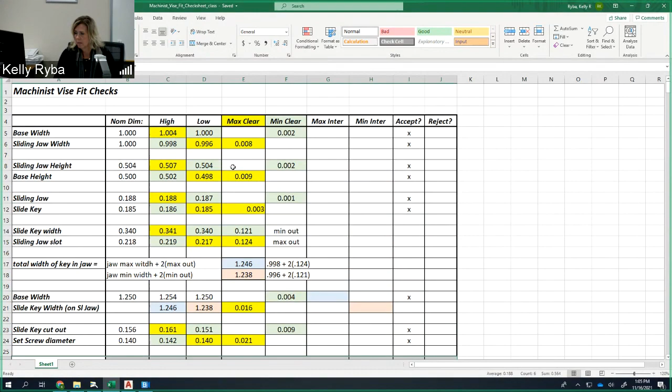And if you use the PDF version, just make sure that things are legible so that I can read them, but also that you can fit it in there, and you're going to have to scan it and then upload it. The Excel you can fill out, and then you can just attach the file itself or do an export and make a PDF too. It's up to you, whichever way. Both of them are pretty straightforward.

So where we left off yesterday, we went through up until the set screw location one, which is right about here. Okay, right about here. So we're going to be starting with this one today. And then, like I said, we're going to make our way through the rest of the fits here, and we'll be able to then start looking at our drawings and how we're going to adjust those.

So I know some people got pretty far on these yesterday based on the format that we were using, but there are a couple that I do want to demonstrate and make sure that we have a good handle on, and what my description meant, because I know there was a question or two on that as well. So the first one that we're going to look at here is going to be the set screw location and the slide key cutout depth.

Now, I don't know if these were the words that I used on the original one, because I think I might have changed the description here. So I just wanted to... hang on. Oh, there we go. This is the PDF version. So no, that one, I guess it is okay. It's this one right here we're going to be starting on. There might be one a little bit later that I changed.

So I'm going to pull my spreadsheet up, and where I have this grade is where we're going to be starting. Now, the numbers that we see here aren't really reflective of what we're going to be doing. So that's why I want to demonstrate this and show you a picture. So this guy is going to be utilizing the sliding jaw, the set screw, and the slide key, okay? So I'm going to go underneath my document camera.

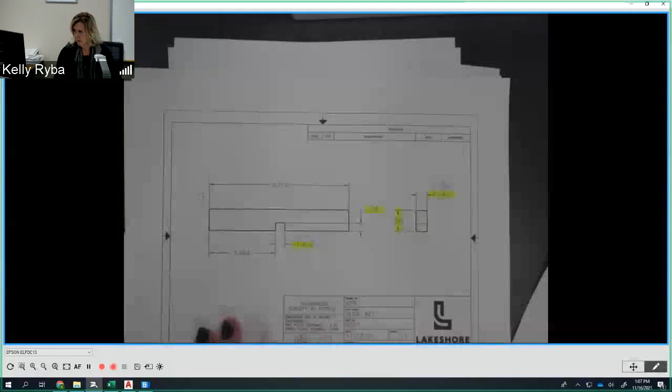And as we look at the dimensions that were given to us, so on the actual slide screw here, I'm sorry, the slide key itself, the dimension that we're going to be looking at here is going to be this guy right here. So on the pictorial, they do give us 0.341 to 0.340. I drew it at 0.340, so it would be to 0.341. Okay, would be the top.

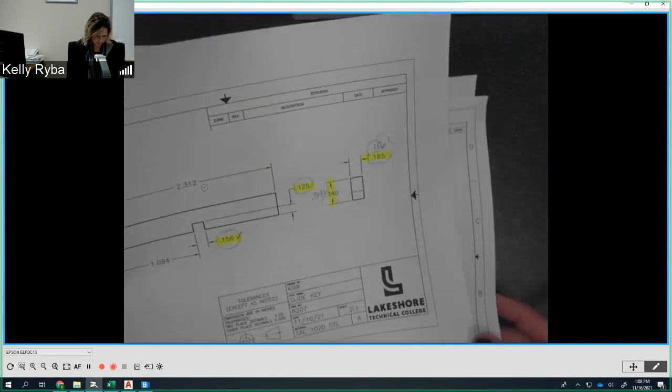So we want to check this, and we want to determine where we have this cutout right here, the 0.125, if our set screw is going to fit up in there. And oh my gosh, there's like three different views we've got to look at here. So this key is going to sit in this orientation horizontally like this, so that our cutout is right here, and the set screw is going to come up in between.

And what we want to make sure of is that this isn't going too far in or too far out, so that it actually can catch on that set screw. And that's going to be dependent on how it sits here in our sliding jaw, and also the size of the portion of the set screw that's going to be on center there. So what I want to do first is check how far in and out this surface right here is from the edge of the part.

So I wanted to draw this in a larger format so we can add some dimensions here and get a little bit better perspective, because that drawing is a little bit small. So here is the cutout in the sliding jaw. Okay, so here's that cutout, and that cutout dimension, if we call this edge 0, the left edge, so where I'm at is right here in this view, and then this is the cutout.

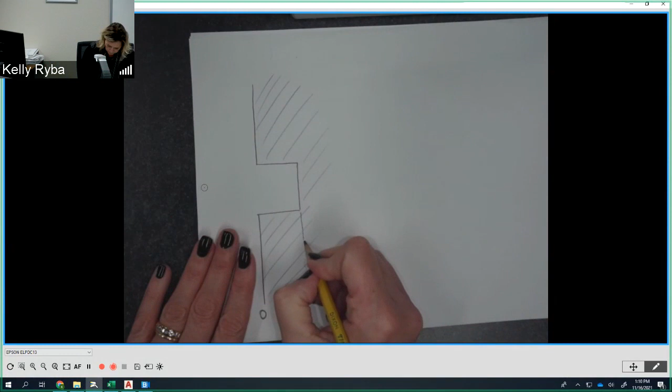And if I look at this right here, the dimension of that on our pictorial view goes from 0.219 to 0.217. Okay, so it can go out that far and in that far. So kind of like this, right? Now, when I slide this in, in this orientation, this is going to fit right in here. So I'm going to put it in here. It's really not going to have much of a gap at all, but the slide key in this orientation is going to sit in right like that.

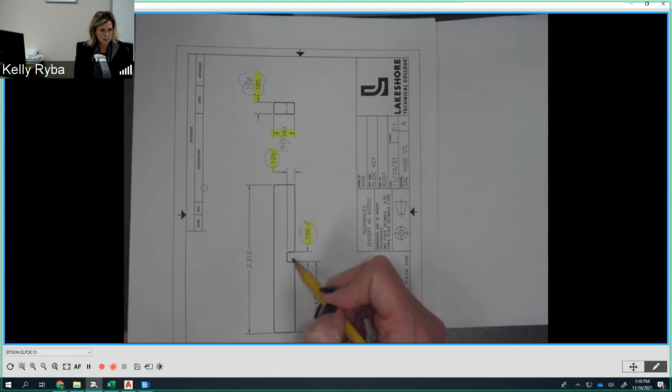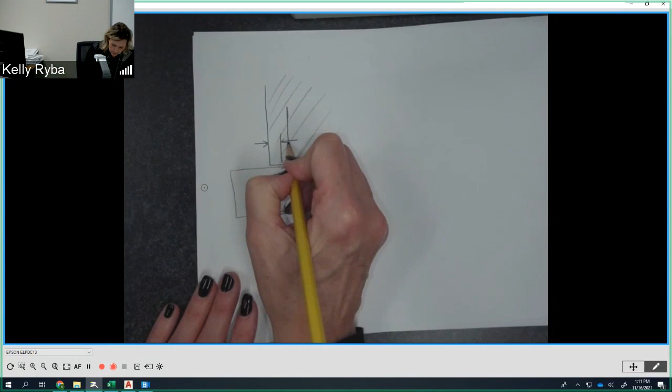And what I'm interested in, this is that cutout for where that set screw is going to come up through the inside. I want to be sure that I don't have interference there. That's what I'm looking at. So I want to know where that is, like the closest and the furthest away from that edge. And so I want to determine from this side right here what this number is, closest, and what this number is, furthest away. I want to know what that is from here to here and from here to here.

Because I want to ensure that when I'm at my worst case scenario, if you would, that my set screw is still within this bounds right in here, all right? I don't want it out here. I don't want it all the way in, okay? I want to make sure that it's catching because it needs to. I mean, that's what's going to keep that in place, okay? So I'm first going to determine where these two edges are, okay?

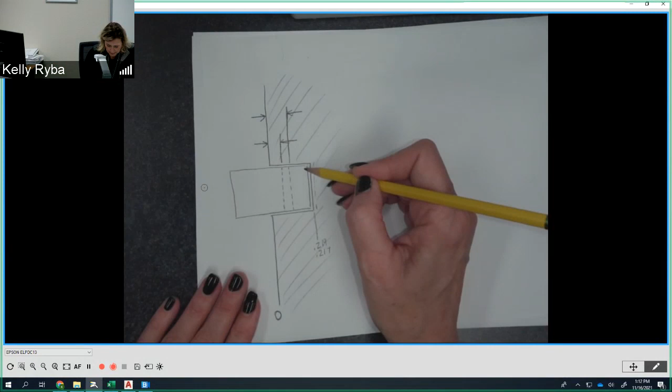Now, to do that, I'm going to use the information from these two drawings. So if I know that this is going out to 0.219, that's as far out as it's going to go, okay? So my worst case scenario then, is if I'm all the way out over here, I want to know what my biggest gap is going like in here. And then I'm going to go as close as I can this way, and then how far away that edge is going to be, okay?

So to determine that, I'm going to kind of start here at my 0, and I'm going to go out. And then the mating surface is going to be this surface right here, right? So that means that then my dimension going backwards is going to be right here, which is the 0.125. Now, if I look at my pictorial view and just see, did they give us any sort of a tolerance on there? They did not. So that means that it defaults to our title block, which is plus or minus 5 thousandths.

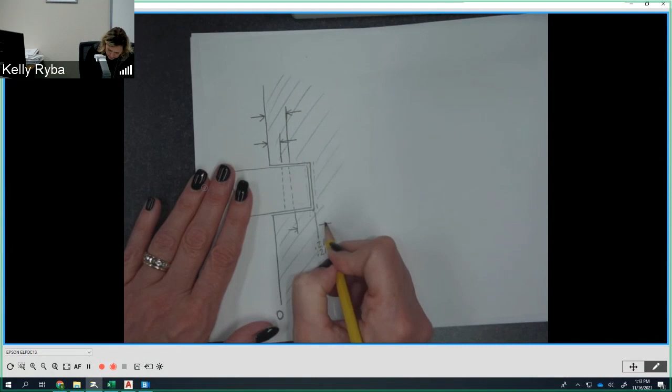So what that means is that this dimension from here to here, from this edge, and these would be together, from here to here, this is going to be this value and this value, okay? I'm going to go like that. Now, the smallest number that it's going to be from that edge to here is going to be minus 5 thousandths. So it's going to go from 0.120, right, to, then I'm going to add 5 thousandths, 0.130. Okay, does that make sense?

All right, so now what I want to do is I want to determine, okay, what's my furthest out point this way, and what's my closest point this way to that edge, okay? So now to get the closest point to that edge, that's going to be my smallest number minus my largest distance. Would you agree? My smallest number minus my largest distance. And that number is going to give me what's left over right here, okay?

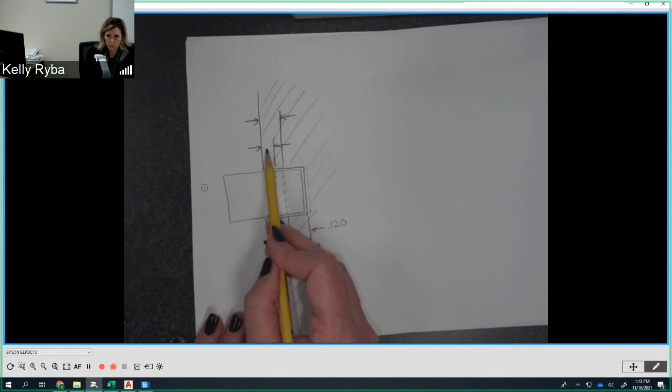So if I do that, calculator, 0.217, I'm going to subtract off 0.130, and I'm going to get 0.087. Agreed? So it's this one and this one. So I'm all the way out to 0.217, and I'm going to come back my greatest amount, and that's going to give me my smallest gap right here, okay?

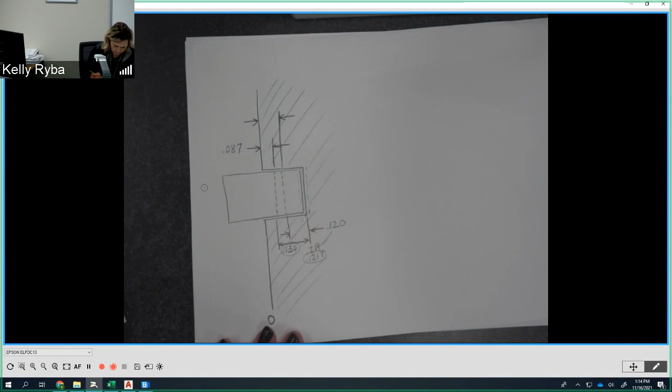Now I'm going to do just the opposite. I'm going to go, okay, what's my furthest point out? And then the extreme on that end would be the smallest dimension here. So I'm going to take then these two guys. So I'm going to do 0.219 minus 0.120. And that's going to be 0.099. Is that right? 0.219 minus 0.120, yeah, 0.099.

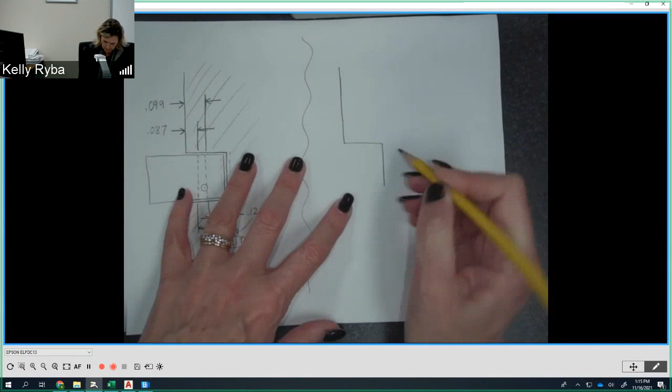All right, now what that tells me is I have to make sure that when I put my set screw in place here, that I don't hit either one of those numbers. So I'm going to do this very same thing for the set screw side now. I'm going to go like this, and I'm going to compare. And we're going to start with that same edge because the set screw is dimensioned from this very same 0 dimension, meaning the center line for that set screw.

Okay, and if we look at the drawing, that's where this is coming up, okay? Now they have it centered on here, 0.625, but we have to get a dimension from one edge. So on ours, we did add the dimension of 0.188. Because we weren't given any different limits, we're going to stick with plus or minus 5 thousandths to default to our title block.

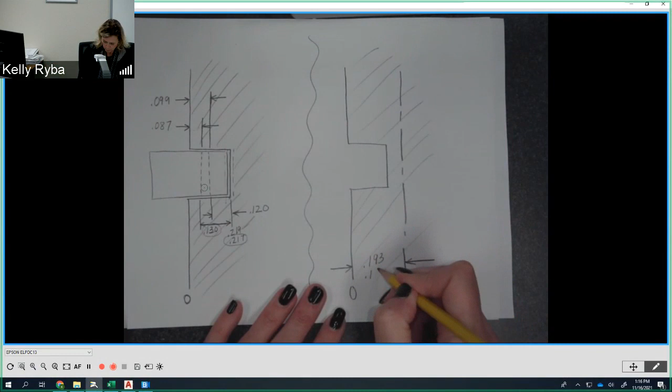So this distance right here is going to vary plus or minus 5 thousandths on 0.188. So this is the same sliding jaw, so it's going to be 0.193 to 0.183. So it's the 0.188 plus or minus 5 thousandths, okay? That's how far it's going to kind of go back and forth, if you would.

Now, our set screw is going to sit in here, okay, on center to wherever that kind of floats, right? So that's where our set screw is going to be. So we need to know how far in and out does that go so that we know that it fits where it's supposed to, inside of that little gap.

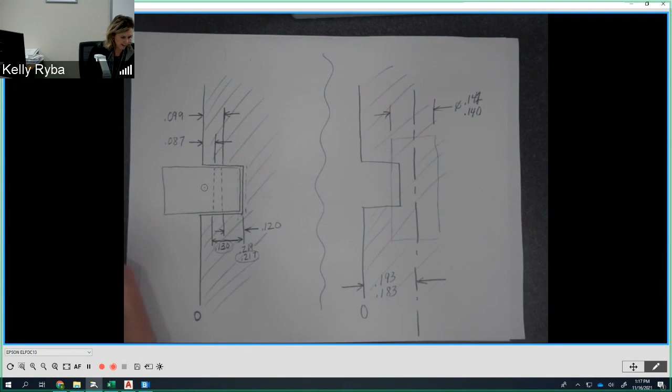So this diameter right here is a diameter of 0.142 to 0.140. Let's verify that. Okay, so if we look at our pictorial on that set screw, 0.142 to 0.140. I need to slow down. I'm thinking like 2 steps in front of the numbers I'm saying. That's why. Okay, so on center though, half of that is what I'm concerned with, okay? So my half that's going to be on this side of my center line is going to be 0.071 to 0.070. Agreed? Okay.

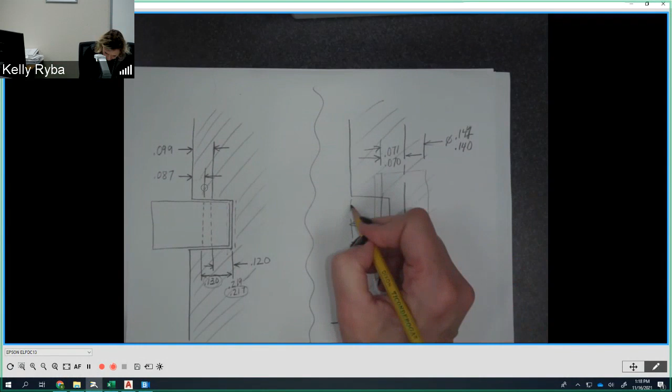So we want to know, where does this land? Where does this land from here, okay, to here? And we're going to kind of show a far and a wide, if you would, and that number. Okay, we want to know what those two numbers are because we want to be sure that they don't go into where these guys are landing. So we need our numbers to be bigger than 0.099, right? We want them to be on this side of that, okay?

So what we're going to do then is we're going to say, okay, worst case scenario, closest one is going to be my smallest number combined with my largest radius, right? So we're going to take 0.183 and we're going to subtract off 0.071, okay? 0.183, 0.071. So my smallest dimension is going to be 0.112, okay? Now my largest dimension then is going to be 0.193 minus 0.070, right? So that's going to be 0.123.

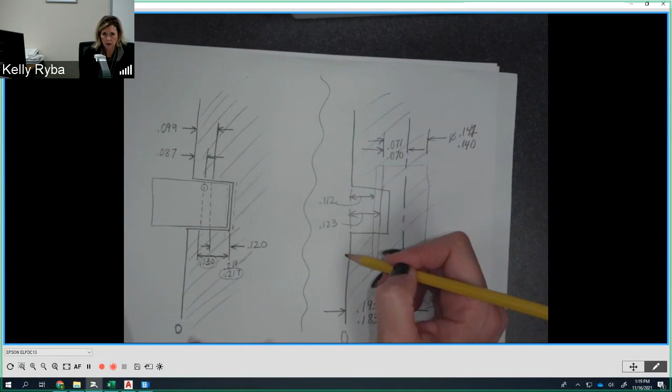0.123. Now, these distances are away from this edge. So we're going to compare where our cutout lands, again, where this edge right here lands in relationship to that side of that part is going to be in this range right here. So our closest to the inside is that number, right? Over here, we want to make sure that we don't interfere with that. So we need our smallest number to be larger than that. And it is. So we're good to go.

Okay? So we're good. So there's not a way for me, when I put it on my spreadsheet here, that's why I said, see the demo in class, because there wasn't like 2 numbers we could compare. It's kind of like we had to do 2 and 2 and then compare the results at the end. So that's my demo for that one. And on the end of that demo, I accepted both of them because we were fine. And it's a mirror image on the other side, so we don't need to do the other side. Okay, any questions on that one?

That's what I meant by that. So the numbers are here for no other reason than those were the numbers that were given to us, but they were part of the more than 2-step calculations that we did during that demonstration. So any questions on that? Yes? So then we wouldn't write anything in the... You really don't need to. There's nothing to write except, and maybe I'll do this. I'll just go like this, and we're just going to accept. That's it, okay? Based on the demo. I just don't know what else to write because I kind of wrote it out here. Does that make sense? Okay.

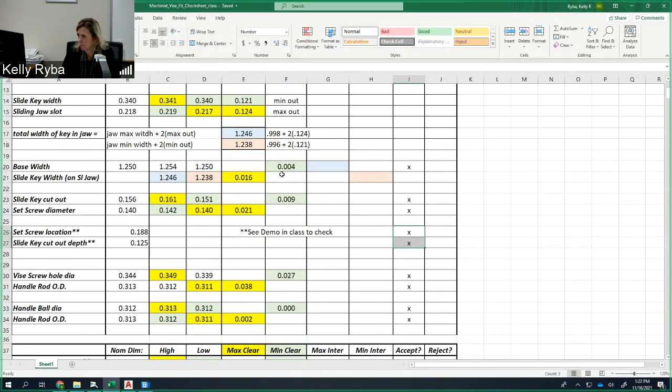Should we accept the 0.016 too? It's probably hard to see, but where it says the slide key width - remember, this one wasn't a separate drawing. This right here is the combination of the width of the key inside of the slot on that sliding jaw. So these two numbers right here are the key sitting inside of the actual jaw, so there's not a dimension to accept there. Does that make sense? Yep.

So this dimension is an accepting dimension based on the fit that we achieved. We kind of combined two things here, so there wasn't one dimension to accept. Does that make sense?

But I guess what we could do is go back up to the top here and accept these two. These two are okay based on the fact that it worked down here, so we could actually mark these two accepting. Does that help? Yep, yeah. Thank you.

Okay, so we did our demo. The next one is going to be our vice screw hole diameter and the handle rod OD. Let me put these guys aside, and we want to get the vice screw hole diameter. Vice screw and we need the handle rod.

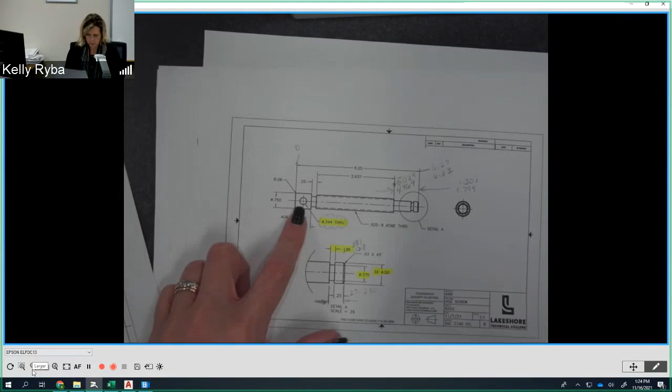So if I go over here, the vice screw hole, it's this guy right here, and we are putting our rod handle through there - so this diameter right here. Now if we look back at our pictorial, the diameter of the handle rod is 0.312 to 0.311. I added that here, so that's what's there. And then this needs to slide through - this is the handle portion sliding through the end of our vice screw, and that hole is right here, 0.344.

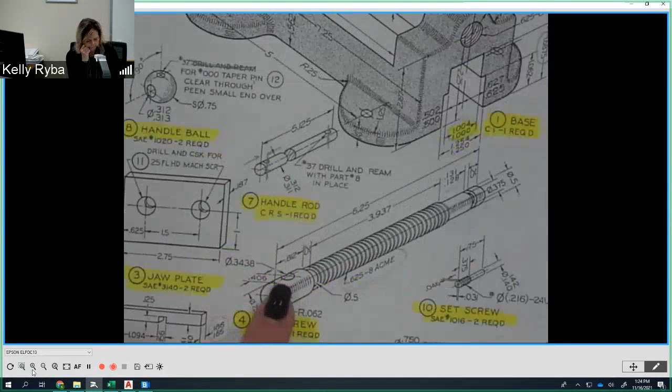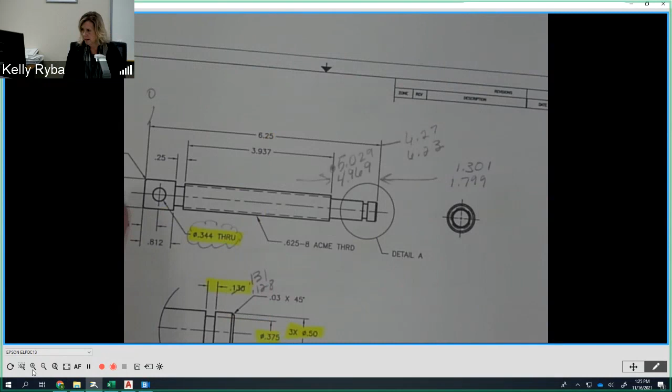Now on that vice screw, they put this out to 4 decimal places, but they did not give us a tolerance. So what I decided to do was round it to 0.344 and take plus or minus 5 thousandths, because there's not a 4 place given. Honestly, this is not a critical dimension - this is a clearance hole so that this can freely slip through here. I'm sure all of us have encountered a vise where this slips through here and then we can crank on one side, then when this comes up to the top it kind of goes down again and so on. So we want this to freely fit in here, and that's what we're really checking - what is that freely floating fit.

So I kept this at a diameter of 0.344, plus or minus 5 thousandths from our title block. And then for the handle rod we're using the 0.312 to 0.311 based on their number. So on our spreadsheet, the vice screw hole's nominal dimension was 0.344. Added 5 thousandths to go to 0.349, that's its max number. 0.339 is its min, minus 5 thousandths. The handle rod, its high was 0.312 and its low was 0.311.

So when we take the largest hole minus the smallest rod, we get the max clearance to be 0.038 or 38 thousandths. And when we take the smallest hole minus the largest rod, the minimum clearance is 27 thousandths. In both cases it's generous, and it's going to freely float through there, so I accepted both dimensions as printed.

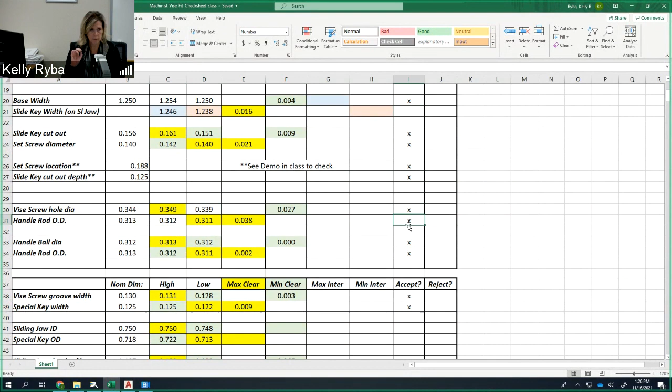But again, we converted the 0.3438 to 0.344 and did a standard title block tolerance of plus or minus 5 thousandths. So if I look back at my drawing, this is going to hold - I'm not going to change that dimension on my vice screw, but I'm going to add the limits for this. So I'll cross this out, and those will be my limits for that one. Any questions on that? Great, cool.

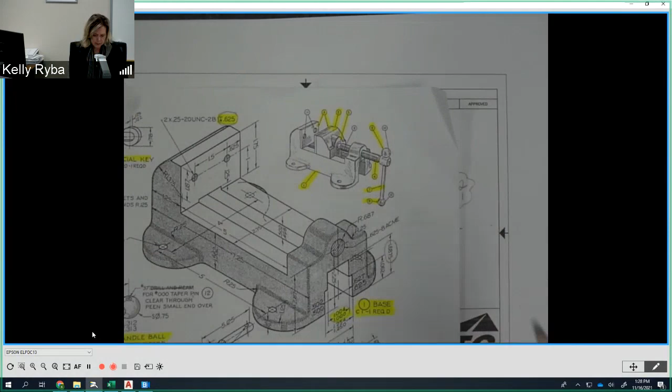Our next one, the handle ball diameter and the handle rod OD, outside diameter - so the handle rod and the handle ball. If I look back over here, this dimension right here, the 0.312 through, is what is going to accommodate the handle rod here. So if we look at our pictorial, we're going to be putting the balls on the end, and that really is what helps the handle not to slip all the way through the vice screw end there. So these guys are going on the ends - now these are going to be going, actually maybe this is a better view.

Our handle rod is going to fit into this larger hole, and the hole goes all the way through, but once it gets to the other side, we're going to pin this in place. There's going to be a pin that's pressed in there, done at assembly.

So what's holding this in isn't really the fit. If we look at the dimensions given, the handle ball diameter is 0.312, with limits of 0.313 to 0.312. The rod handle that goes through there is 0.312 to 0.311.

So if we take the largest diameter on the ID of that ball and the smallest diameter on our handle rod, we get 2 thousandths clearance. If we take the smallest of both, the smallest hole and the largest rod, it's line-to-line contact, so there's no clearance at all.

Glenn doesn't like that. Glenn's like, I don't buy that. Glenn, what are your thoughts on the fit there? You're never going to be able to press that together. Yeah, he feels that it's just too much. You'd have to maybe even heat one up and cool one off if you had the chance.

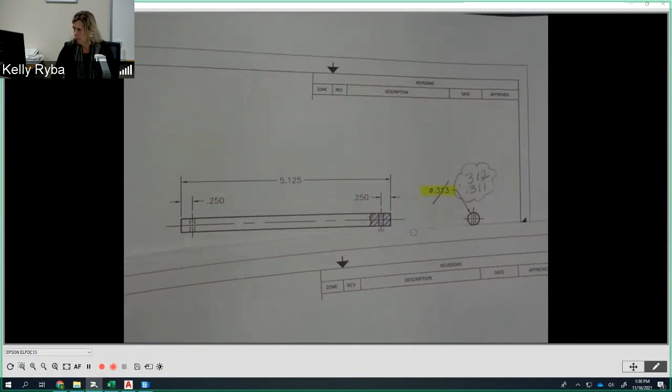That's where we start looking at what we need to change. We want to look at those two values. Now, we already used that diameter for our handle rod, and we kind of approved it for fitting through freely our vice screw, so it's probably not a terrible idea to leave that alone.

But we can also look at practicality-wise to hold 1 thousandth diameter over 5 inches. It isn't that easy to do. And it's a pretty small diameter, so it's going to flex a lot potentially when this is being made. So because of the fit that we have, that's a lot over that length.

So we could change this dimension if we wanted to, and I wouldn't be opposed. Me as the designer, my thought would be, why don't we open that tolerance up a little bit? 1 thousandth over that length seems kind of extreme, especially since it's just a handle. It's not really a critical part.

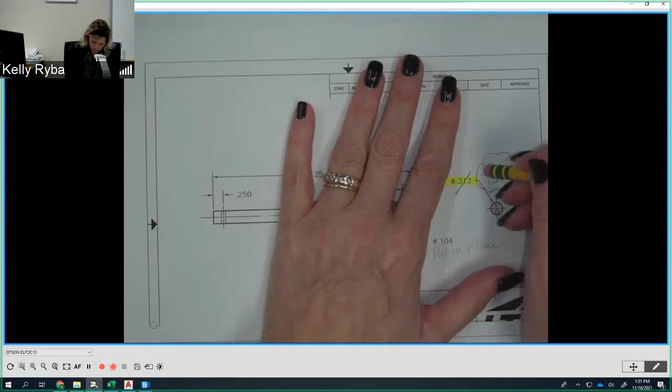So how would you guys feel about changing this? What is this number decimal-wise? 5/16, is that right? 0.3125, yep, 5/16. Okay, so if we would say 0.313, and we would maybe go plus or minus...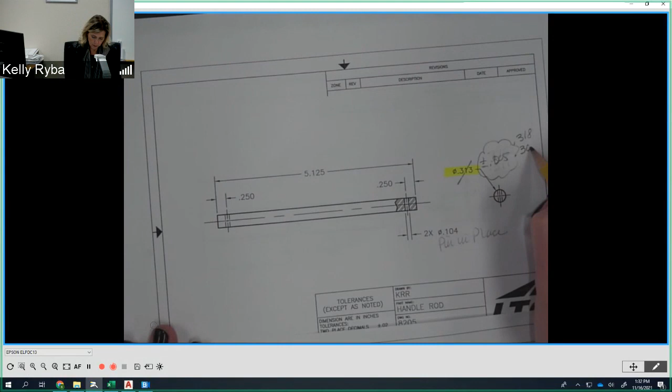Could we do plus or minus 5 thousandths? What do you think, Glenn? That would be 10 thousandths over the length. We'd have to go back, and that would go up to 0.318 to 0.308, right?

And if we go back to our other dimension, we got to go back up here because it affects this diameter. So if we say 0.318 down to 0.308, this dimension goes to 40 thousandths, and this one goes up to 21 thousandths.

We still have pretty generous clearance. What do you guys think of that? I kind of like that better. Anybody opposed to that, the designers that are here live?

So I kind of like the idea of changing that over, leaving it actually as a 3-place decimal that defaults to the title block. So we would be able to leave that dimension then as printed, because it would be a plus or minus 5 thousandths. It would default to the title block. It actually saves us from changing that print at all.

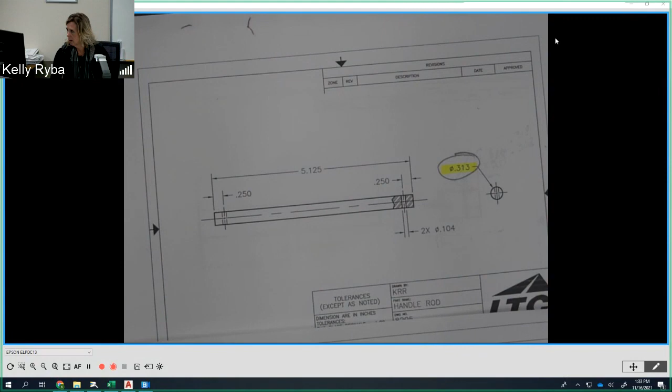Okay, so we're going to leave that. That means that on the next part here, we've got to look at the fit that we do. Does that make sense? Because it defaults to the title block, so we don't need a plus or minus 5 thousandths, and we don't need to put any limits there.

But now let's go down to the handle rod OD, and let's change it to these new numbers, 0.318, 0.308, okay? Now, these are going to be different, okay. So as we look here, we have kind of a lot of interference between these two, okay?

So we're going to have to change this ball diameter on the inside. And Glenn already decided he wants to have, what is it, 5 thousandths to 2 thousandths? 0.005 is going to be our, and 0.002 minimum, right? Minimum. So if we want to achieve that, and we have 0.318 on our handle, that means that we have to add 2 thousandths here, right?

So this would be 0.320, the smallest hole there. Do you guys see that? How I got that? So we're trying to achieve 2 thousandths here. So if we know that our largest rod is 0.318, then that means our smallest hole has to be 2 thousandths larger than that, okay?

Now, if I want 5 thousandths on the other end, that means that I'm going to have 20 thousandths here. So then I've got to add at least 5 thousandths, but it's going to be more than that, okay? That's my minimum.

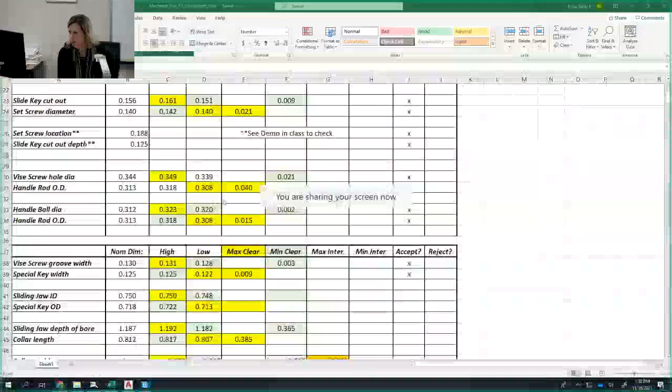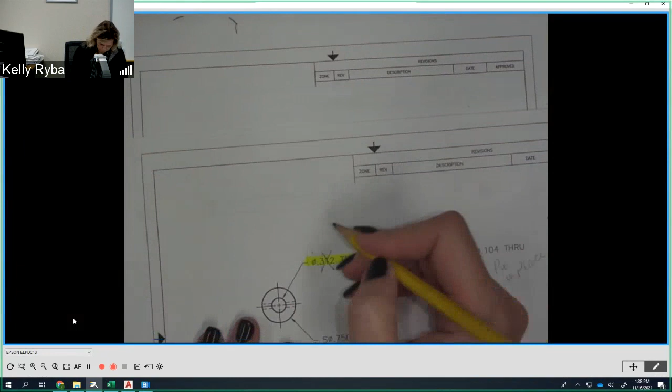Okay, so we will keep this here. So that means that our handle rod remained the same as we had made the change. And then now our handle ball diameter, that diameter is going to be different limits here, 0.323 to 0.320. So if we go over here, okay, that's going to be the number there. All right, that looks good. Okay, and then we have a check over here.

Cool. Let's look at the vise screw groove width and the special key width. Make sure that that special key fits in there. So if we pull up our vise screw and we find our special key. So let me go over here.

Special key, we're going to look at this number right here, and then we're going to look at the width of the groove right here. So as we look at our pictorial, the special key, we are given 0.125 to 0.122 is the width. Okay, so 0.125 to 0.122. And then if we look at the screw right here, the width here is 0.131 to 0.128. So here, 0.131 to 0.128.

Okay, so when we look at those two, making sure that our special key fits inside, the high dimension is 0.131, the low dimension for the groove width is 0.128, the high dimension for the special key is 0.125, and the low dimension is 0.122. So our max clearance is going to be when the groove is at its widest and the key is at its narrowest. So we have 9 thousandths clearance.

Then our minimum clearance is going to be when the key is at its widest and the groove is at its narrowest. And that's going to be 3 thousandths. In both cases, we have clearance. So I have an accept and accept here. On the 3 thousandths, you might have to tap it in a little bit, right, Glenn? But not awful, not awful.

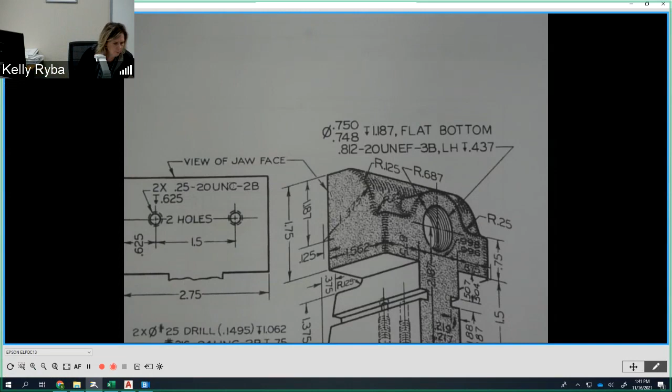All right, the next one, we want to look at the sliding jaw ID and the special key OD, all right? Now, as we look at how this is going to go together, I have a little sketch and I'm gonna draw it. Some of you might have a good idea, but there might be a couple parts here that aren't coming together in your head or not making a whole lot of sense. So what I want to do is show these little inners that we don't end up seeing due to the pictorial. So it's really what's going on in the body right here.

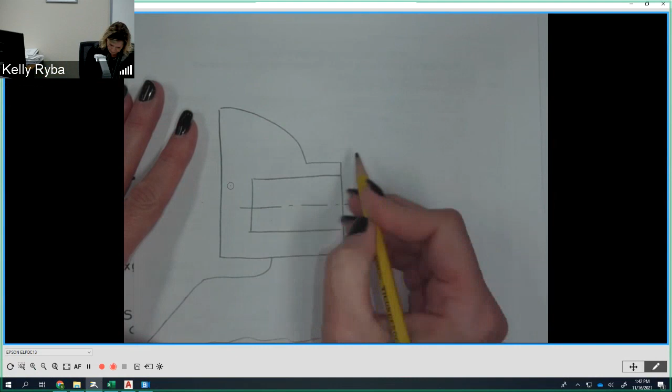So we know that in our sliding jaw, we have this threaded portion, and our collar is going to fit in here. And then we also have this 3/4 of an inch that is going to be bored to a flat bottom. So if we look at the side view here, I'm going to enlarge this. And this would continue down. It would come out and down. Okay. And our center line for that bore, the bore is going to bottom out about here-ish. Okay, it's a bottom bore, and then we have it threaded to this portion right here.

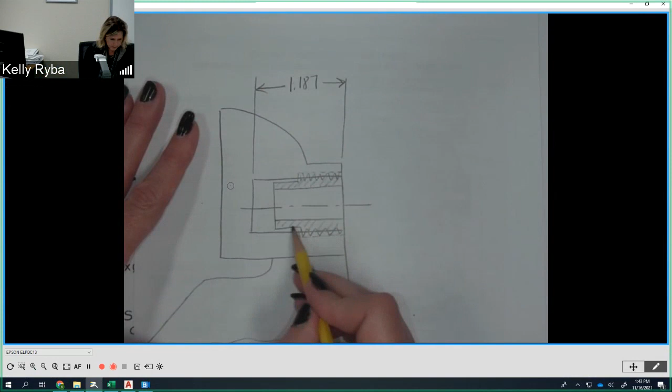Okay, so our collar is going to be sitting inside here, and it's going to come down. So the collar is going to be threaded here, it's going to come down a little bit, go down here in the inside like this, okay? And then the collar has an ID on it. So this would be a cutaway of this, right? Now the bottom of this bore is 1.187, like that. Our collar is going to fit in here. That's this collar right here, but it's actually going to sit in this orientation, like that, okay?

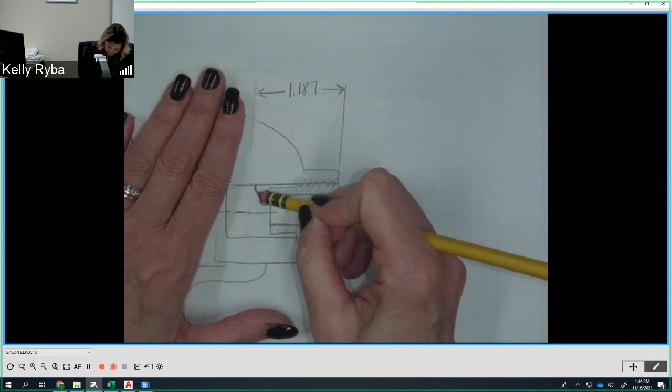I'm going to increase this a little bit. I know this is not in proportion to the front of this face. I think this would go out a little bit further and be sitting like this, okay? All right. Now, what's going to fit in here is our vice screw. Our vice screw is going to sit in here like this. And at this area right here, this is going to go down, this is going to go up, like this. And this is where our special key is going to sit, right in here, okay?

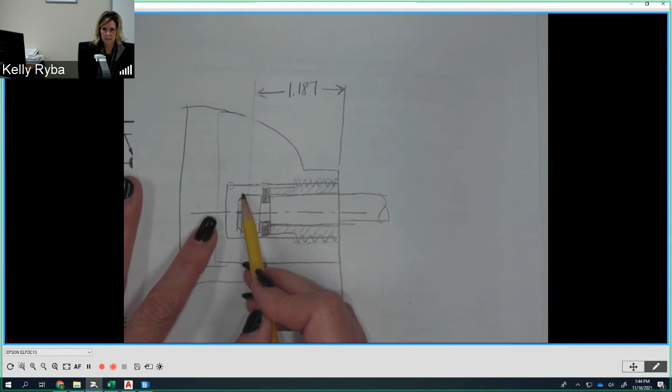And when this goes in and our special key is in place, so how you have to assemble this is we're going to put our vice screw in. We're going to put our special key in place. We're going to put our collar on, and then we're going to thread it into this hole. Okay, makes sense? Now, what that special key does is it actually keeps this moving back and forth. So as I rotate my screw, this is going to come along back, and it's going to go back and forth within here, okay?

And this is actually going to be, we want this a little bit closer to the front here, because then this can push up against there to push it forward, and then it's going to pull back on here to go backwards. Okay, so this is going to float in here just a little bit. We don't want it to float much, but it's going to float a little bit in there.

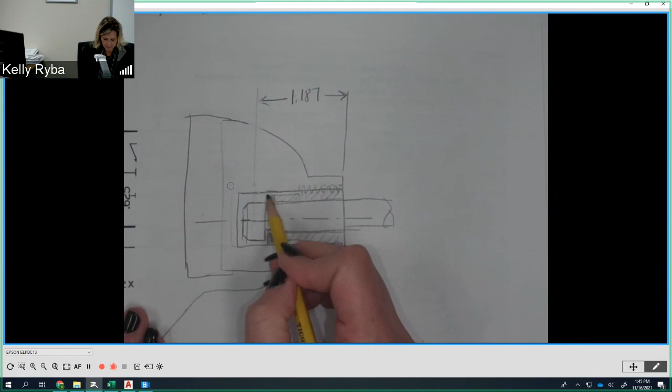Okay. Now, what we want to check is that the outside diameter of that special key is not going to interfere with the inside diameter that is here on our sliding jaw. Those are the dimensions we're looking at this point. So if we go back over here, sliding jaw ID, that is this bore right here, and that diameter is 0.750 to 0.748, and that's on our sliding jaw. Here we go. So I have that on my spreadsheet here, 0.750 to 0.748.

Then what we want to do is look at the special key OD. The special key OD is a 3-place decimal. So on our pictorial, that outside diameter is 0.718. There's no tolerance on it, so it is going to default to the title block, plus or minus 5 thousandths. So on the spreadsheet, we're going to add and subtract 5 thousandths off of 0.723, and 0.713, right? Plus or minus 5 thousandths. So this has to be a difference of 10 thousandths.

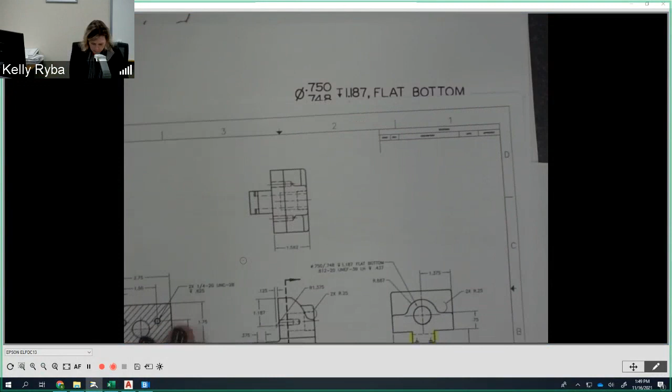0.750 minus 0.713. Okay, so 37 thousandths. And let's do this one. 0.748 minus 0.723, 25 thousandths. Okay, so there is a generous amount of clearance in both cases, so we could accept both of those dimensions. So this one is good, and the one that was there on the drawing itself, that was part of the note. This is okay. So it's that diameter right there.

All right. Home stretch here. So we did those two. The next one we have is the sliding jaw depth of bore, and then the collar length. Yes. So if we look at our drawing, we want to make sure that our collar isn't too long for the depth here. I think it's pretty obvious when we look at the numbers, but we did the comparison just to be sure. So this was 1.187, and it defaults to the title block plus or minus 5 thousandths. So 1.192 to 1.182 for the sliding jaw bore depth.

And then the collar length is 0.812, but it's plus or minus 5 thousandths as well, defaults to the title block. So 0.817 to 0.807. So again, a lot of room here that we have to float. But this dimension now is going to be important for the end of our vice screw. So if we look at the sliding jaw bore depth and compare it to the space that's left over when the collar is in there, that's these two numbers right here. So what I did was collar and bore space, and that's how much room is left over from the collar to the end of the bore. That's that number right there.

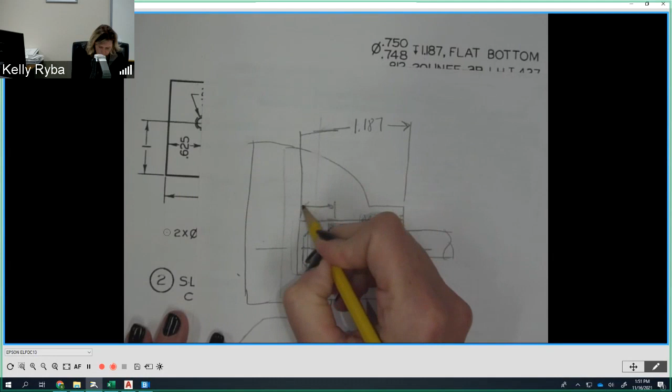And that number is the maximum clearance and the minimum clearance from the one above. So that's what we have here. So the high number for that amount of space is 0.385 and the low number was 0.365. So it's this difference right here, from the collar when it's in position. Now, the vice screw groove to the end. Let's look at what that means.

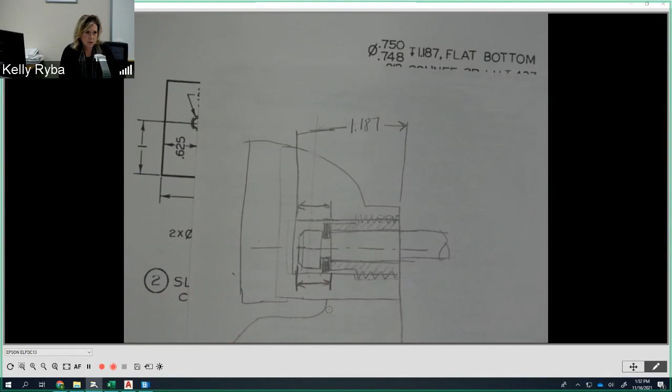So that means I want to know this groove from here, which is the end of the collar, to the end of our vice screw, to that little end right there. I need to know that number. This number needs to be smaller than that number, right? So let's look.

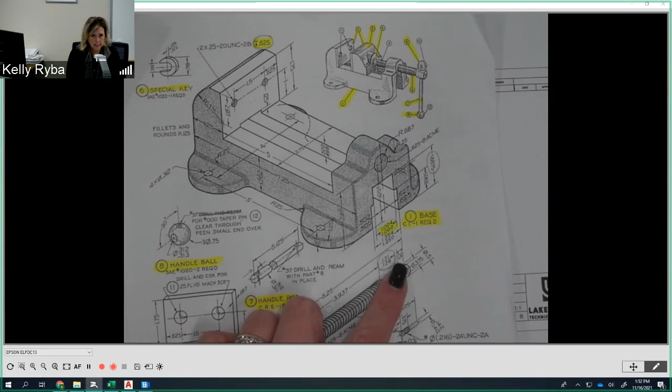I gotta find my vise screw drawing. Here it is. Okay. All right. Now, okay. So I need to know my number right here, this guy right here. So on my enlarged view here, I know that I have 0.25 to the end. Now, this number is 0.25 on our pictorial drawing. So it's a 2-place decimal. It defaults to the title block. So that's plus or minus 20 thousandths or 0.02.

So that means that this is going to go up to 0.27 and down to 0.23, right? From that end. Then I've got my groove, okay? My groove has a limit tolerance on it of 0.131 to 0.128. So 0.131 to 0.128, okay? So now what we need to do is we need to add our worst case scenarios here together. Let's see how I did it on my spreadsheet.

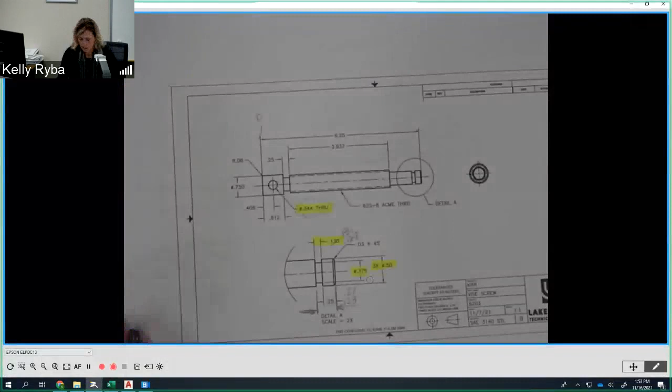Okay, so maximum dimension, okay? Maximum dimension is gonna go from my maximum number here to my largest number on my groove, right? That's gonna be the biggest number overall. So the max is going to be equal to 0.27 plus 0.131, right? So that number looks like it's going to be 0.401.

Okay. My minimum number is going to be equal to my smallest and my smallest, right? So that's going to be 0.230 plus 0.128. 0.23 plus 0.128. 0.358, right? 0.358. So let's look on our spreadsheet. 0.401, 0.358. There we go.

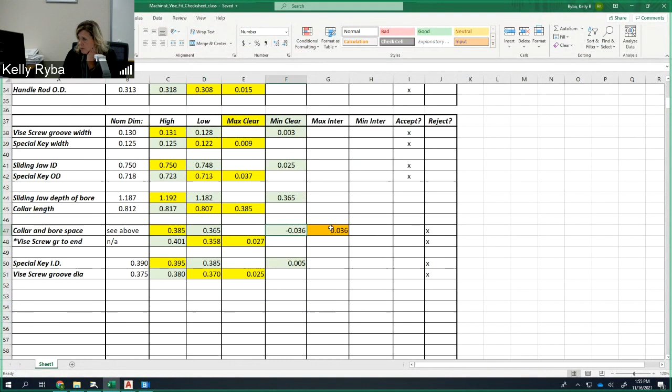So that's good. But now we're going to take the smallest amount of bore depth minus our largest amount of the end of our vise screw, and we can see right away there's an issue here, right? And that's going to be a negative 0.036. That negative means that there is interference. So there's actually a maximum interference of 36 thousandths. So I repeated that here, okay? Now, I would reject this, right? I'm going to reject this. And I've got to figure out then what I need to change.

Now, as I look at my parts, we always want to look at things in terms of what is the easiest thing to change, okay? So if I go over here and I look at my drawings, we want to kind of adjust things here. Now, I know that I have a part in this groove that I already approved, so I'd like to not change my groove, okay?

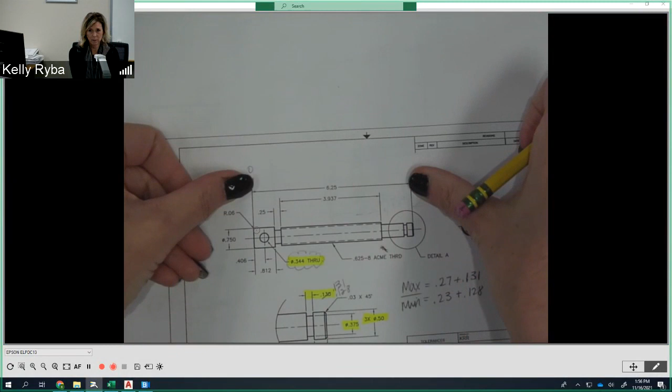As we look at the length of our overall screw, it's kind of to a nice round number. It's 6 1/4, all right? I kind of like that number, so I'd like to keep that if I could. Not a huge deal, but it's 1/4 of an inch. They're nice numbers to work with, okay?

If I look at then the other part that would need to be adjusted, it's the depth of this hole right here, okay? The depth of that hole. So what that would mean to me is when I actually put this in, I would just go deeper. To me, that's probably the easiest place to make the change in terms of changing the parts. What are your thoughts? I agree. To me, I just go deeper, right?

Well, we really want to look at, okay. So right now, this is my number, right? And I've got interference of 0.036, okay? And remember, when I'm pushing on this, it's going to naturally slide and it's going to push on there. So I don't want my gap to be huge, right? But I also obviously don't want it to be negative either. So when I look at this number, okay, if I go to, for instance,

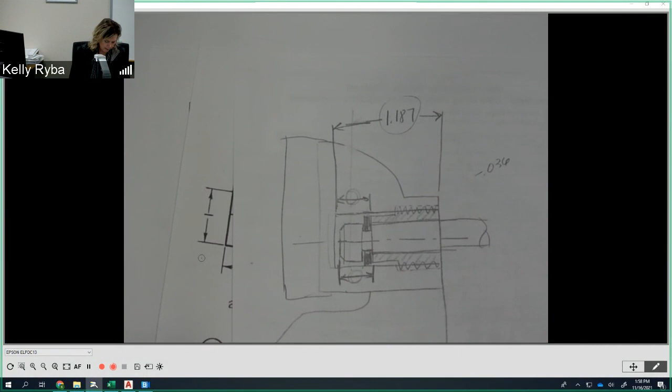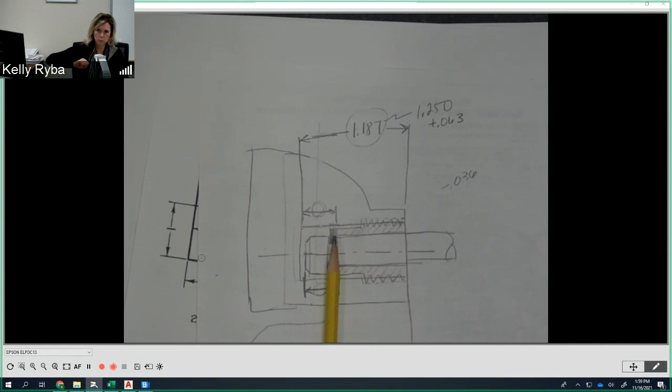So when you go forward with it and it pushes up against there, before it starts coming backwards, it's going to actually have to back up until it hits this back side. So it's going to be pushed forward and then it's going to kind of come back and then it's going to start actually rotating back, okay? And that'll be about a 32nd of an inch, because now we've added that in there. Most places are more than that.

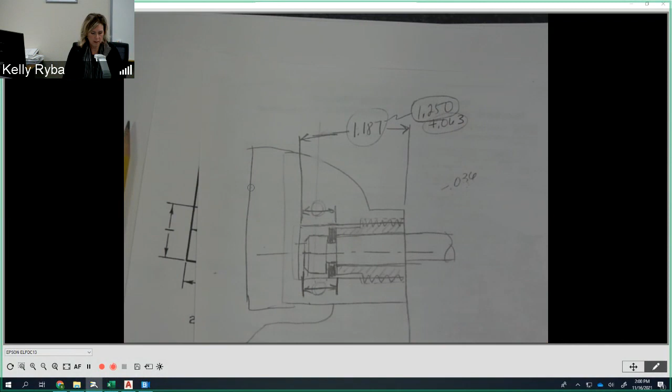Exactly. So I think going up to 1 1/4, which is a nice even number, without going crazy, would be a good idea. Any opposition to that? And again, just changing the depth of that bore is easier than messing around with the end of the vise screw. To me, that's how I look at it. Any other ideas? I'm open.

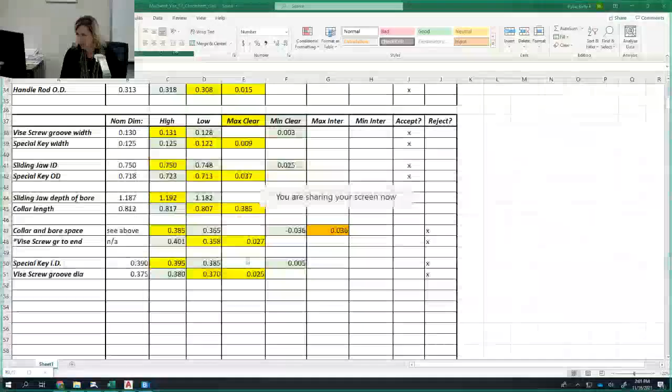So we're gonna reshare the screen, and we're gonna update our sliding jaw depth of that bore to 1.250, okay? We don't have to put deep on there, but that's the number. We're okay with the size of the bore. The depth of the bore needs to go to 1 1/4. Isn't this fun? So much better than just copying what's there.

All right. So what we need to do then is change this, the sliding jaw depth of the bore. This is going to go to 1.25. This is going to go to 1.255. Go to 1.24, 1.245, yeah. And now these differences are going to be a little bit different, aren't they? So 1.255 minus 0.807, 0.448, and then these two, 1.245 minus 0.817 equals 0.428 minimum clearance. So now these guys change.

The high is 0.448, 0.428, and using the numbers that we have here, 0.448 minus 0.358 equals 0.09. And then this one, minimum clearance, 0.428 minus 0.401, 0.027. There we go. So now we don't have any issues anymore. Delete. And we can take that. There we go. Any questions on that one?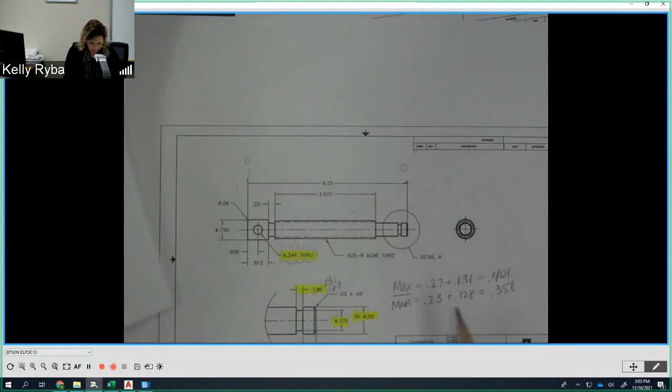So good. The last check I have here is on the special key ID to the vise screw groove diameter, okay? So we pull out our special key again. We just want to check this size to the size right here. Now, both of these are to the 3-place decimal, so they're both going to default to the title block. So that means that this is going to be plus or minus 5 thousandths on that nominal size.

So if I go to my special key ID, my high is going to be 0.395 and my low is going to be 0.385. Then on my vise screw groove, it is 3/8 of an inch or 0.375. It's going to go up to 0.380 and down to 0.370. So my maximum clearance is 25 thousandths and my minimum clearance is 5 thousandths. So again, it might be a tap on sometimes, but we look good there. So I didn't reject. That's an accept. Actually, we can change these guys with the new numbers. Okay. To accept.

I'm just going to put reject, oopsie, REJ, original. So we changed the numbers. Okay. And I think that takes us to the end.

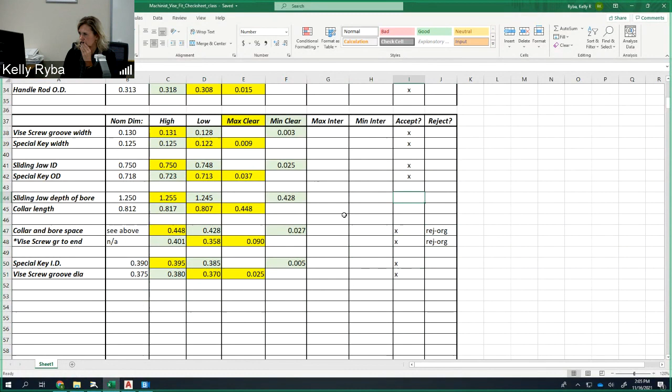Any questions? All right. So what you need to do is you need to go through and fill in, whether it's on the Excel spreadsheet, hopefully following along with these 2 lectures, and putting your numbers in place. I am not going to put this sheet online. If somebody needs these numbers, they have to do what you guys did, sit through the whole lecture. Okay. So I'm just going to say, go to the lecture to get all the juicy details.

Okay. All right, so now that we kind of have everything figured out, right, how things are going to fit together. This is what we just went through the last 2 days, looking at these dimension by dimension. This is the design process. This is tolerance stacks. This is figuring out fits, okay? And yes, we use their numbers as the basis, but we had to prove it. And we found some places where we wanted to make some changes or needed to make changes, okay?

That's the big part of your job. It's not just about making the drawings. It's not just about putting the dimensions in place. Remember, each one of those dimensions has a tolerance, whether it's given to us or we default to the title block, okay? We have a tolerance on everything and we have to check the fit.

So now we've got to update our prints because we went through and we kind of marked these up. So I'm going to just pull my prints out. I'm going to look at them underneath my document camera. Now these are in no particular order at all, okay? And I'm going to put aside the ones that I know that I need to make changes to. They're the ones that I marked up. So I know I need to do this one. So I'm going to put this on my got to change pile, okay?

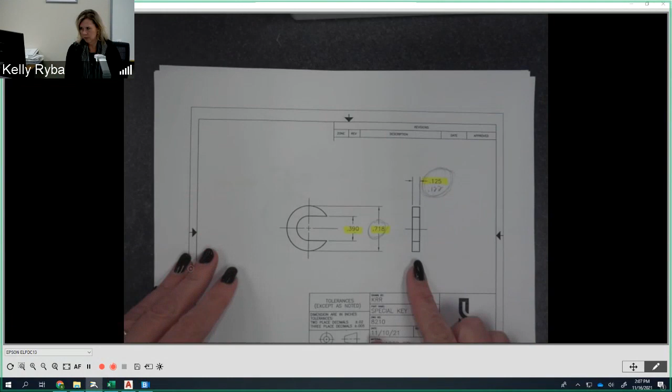So this one though, actually, yep, I gotta put this limit on here. So that's another change pile. That's my special key. My collar though, look, I didn't make any changes to this. This one's good, right? So we're not gonna do anything to that guy. I'm gonna put that on a different pile. That's the good to go pile. First draft was good. This one, I do need to update the one dimension on here, otherwise everything else was okay. So just on here on the vise screw, just that one dimension.

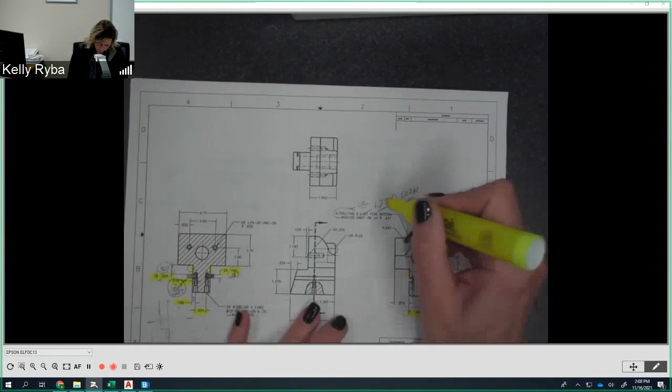On my sliding jaw, I've got some limits to put in place here. I've got this one, I've got 1, 2, 3, 4, and then the depth right here. I'm gonna highlight this one as well. I gotta put that guy in place. I don't wanna forget about it. The sliding jaw has to go on the change pile. My handle rod remained the same, right? At first we were going to put a limit on there, but then we defaulted back to the title block tolerance, so that one looks okay, no problem.

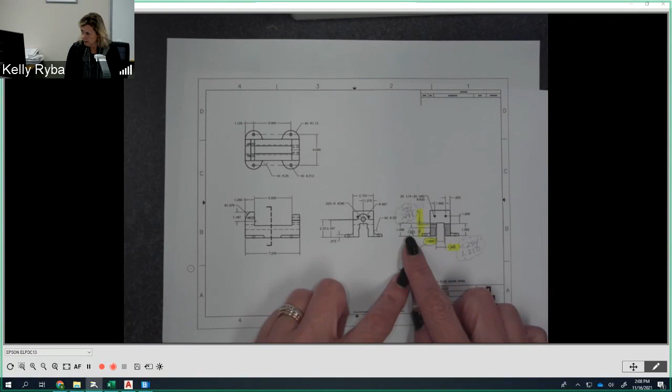Our sliding key, we have 2 dimensions that we have to add limits to on this one. On our set screw, the diameter here, we need to put the limits on that, and I think that's it. Is that it? Oh, let me look. Nope. Base. Base, we've got a couple dimensions here. We've got to add this one in, get rid of that guy. And then we've got a couple more limits to put in, so the base. And then our jaw plate, nothing changed, so that was good to go.

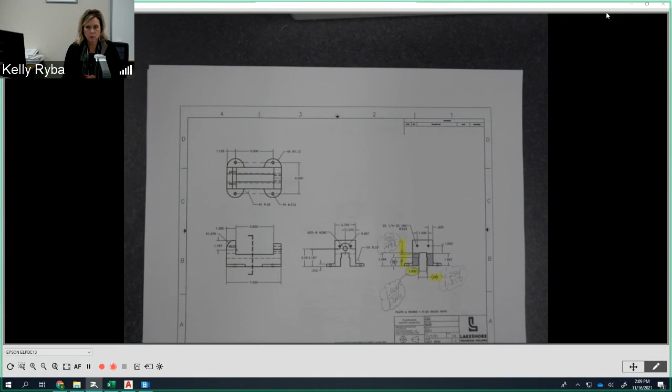Okay, so 3, I think, of our 10 drawings remained in first draft mode, right? So now the other ones are the ones that we need to update, okay? And I know, as you guys have been working with the dimensions, you're like, cool, Zach, we get to create and mess around with the tolerances now, okay? And how do we do that? I think I have alluded to this already. We really actually have to make a style for each one of the changes that we make, okay? And that's why I wanted to go through first to get the bulk of them done, so that now we're just going to focus on the ones that change, all right?

So, for instance, let's pull up our base drawing in AutoCAD. I'm going to save this so that I have it. Oh, it should have saved it. Open up my base.

There it is. Okay, here's my base. So in this section view that I have here, this is the area that I need to make my changes. I need to change this dimension, and I need to change this dimension. I'm going to get rid of this guy, and I'm going to add the depth in there. Now, my question is...

So we will get rid of this guy. We're going to delete that one out, and we're going to go from the section top to the bottom right there. So now I'm set at 2 place right now. Right now, all I have is a 2 place, a 3 place, and whatever that third one was. Oh, that was the center mark, 3rd place. Okay.

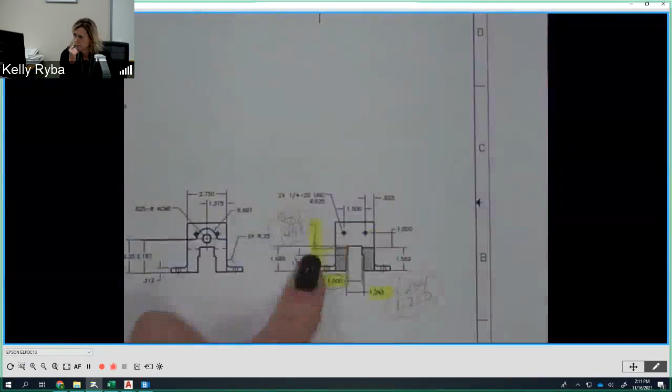Right now I need to make a dimension. If I look underneath, I need to make a dimension that goes from 0.502 to 0.498. But before I do that, I need to know what my nominal dimension is that I drew it at. And I didn't draw it directly. I think I drew it the way that it was dimensioned.

So what I need to do is go to a 3-place decimal here, and I'm just going to dimension, a linear dimension from that endpoint to that endpoint, because I got to know what it's drawn at. Oh, it's drawn at 1/2 inch. So if I look back at my dimension, my drawing here, then my 1/2 inch is right there. It's drawn at 0.500. That means my tolerance is +2, -2.

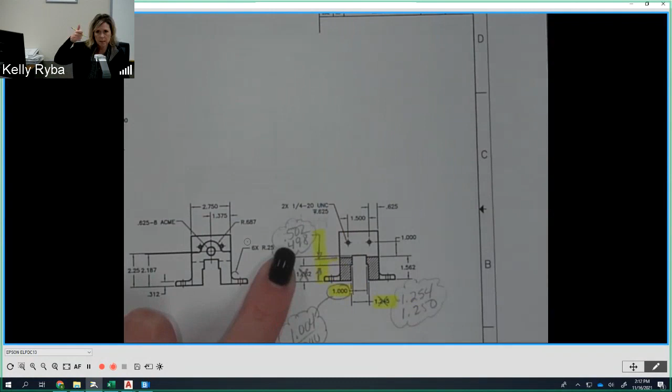2/1000ths, +2/1000ths, -2/1000ths. Okay, so I'm going to go back to my drawing here. I'm going to get rid of this dimension, delete it out of there. And now I'm going to create a new dimension style.

I'm going to do a new one, and I'm going to start with that 3-place decimal. And instead of being copy of 3-place, I'm going to do underscore limits underscore 0.002, okay, and just as a call out, because this is probably going to be the only one of those 3 that's going to be like this. So you can call it really whatever you want.

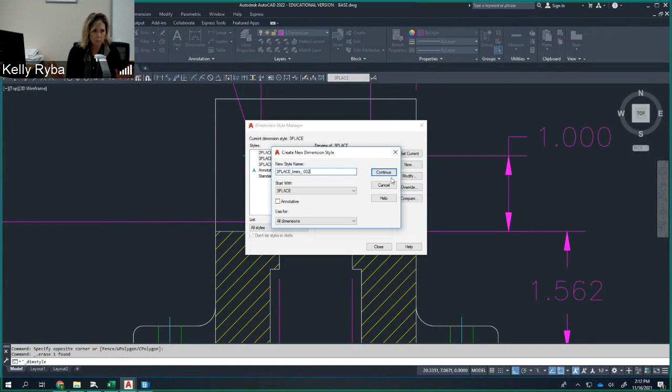So I'm going to do continue, and then go to the tolerances here, the very last tab. So the primary units are 3 decimal places, which I want, and I'm going to go to the tolerance tab at the very end. Now what I'm going to do is, it says method. Underneath method, I'm going to change this to limits. And then the precision is still at 3 decimal places because it's from the previous.

My upper limit, this is where I'm going off of my nominal value or my base number, which is 0.5. So my upper limit is going to be adding to it, so it's going to be 0.002, because I need that to be 0.502. And my lower limit will always be a minus, but I don't have to put the negative in there, 0.002. All right, and then I can hit OK.

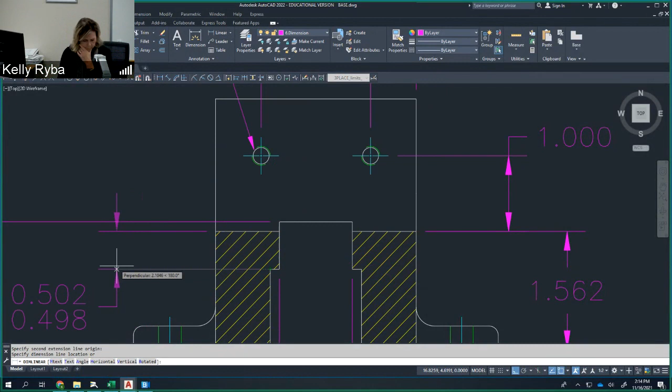And then I can say set as current. Before you go out of here, set that one as current, and then close. Now I'm going to do my linear dimension, and I can either grab it from the top here or do it off of my menu. So I'm going to do that to that. There we go. Now I'm going to put it where I want it to go.

Then you'll notice that I have a dimension line crossing an extension line. So guess what you get to do? I get to move this so that it's nearest right about here. And then I'm going to add a line from there to about there. And then I have to create my gap here, nearest to about there. There you go. You can't have a dimension line crossing an extension line, so we had to change that a little bit. Okay, so there's that one.

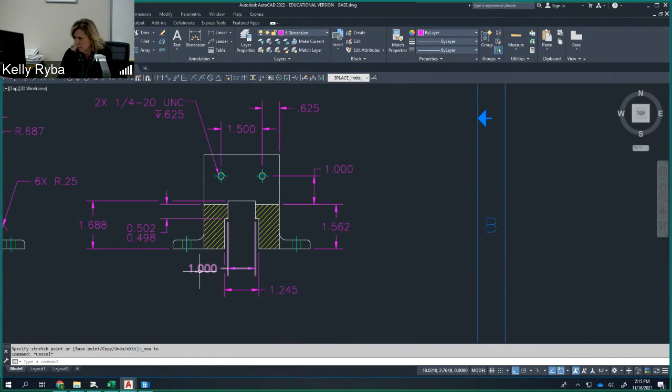Cool. Now I'm going to do the next one, the 1-inch dimension. Now I'm assuming, pretty sure I have that in there as a 1 inch. So when I look at my drawing, I need this to be +4 -0, because my minimum dimension is going to be 1 inch. +4 -0.

Okay, so now I'm going to delete that dimension out of there. And I'm going to go in here to the Dimension Style Manager. I'm going to do a new one, and I'm going to get rid of the copy of. You can leave it if you want to.

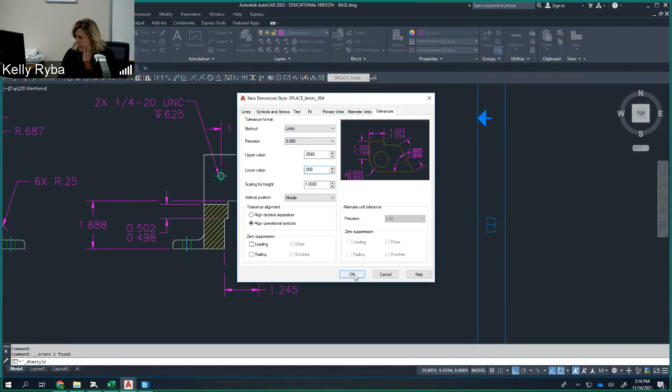This is going to be a limit, 0.004. I'm just going to do continue. And I'm going to go to that last tab where the tolerances are. This is going to be a limit dimension again, 3 decimal places. My upper limit is going to add 4 thousandths, and my lower limit is going to subtract off 0 because I want that at 1 inch. And I'm going to say okay, set as current and close.

And now I'm going to create my linear dimension from here to here. Actually, I want it to go on the other side. I'm going to place it right here for now, but then I'm going to grab the grips and put it on the other side, because I already created a gap there from the original drawing, the original dimension. Okay, so that one's done.

So you kind of get the hang of this, you get to do that. And it's not many dimensions. This one has 3, some of them only have 1 or 2. So it's really not that big of a deal. But there's 1, 2, 3, 4, 5, 6, 7 drawings, okay?

7 drawings. These are the ones that I'm going to add to a Dropbox. We'll do all 7. Does that sound okay on one Dropbox? I think that makes sense. Or do you like it better when it's split up, maybe 3 and 4? 7 is okay, just 1?

Okay, so there'll be 2 things that you have to hand in for week 3. There's going to be your fit check sheet, going through all of those, whether it is in the form of manually filling it out as a PDF and then re-scanning and uploading it, or filling out the Excel spreadsheet with the numbers, using the numbers that we have.